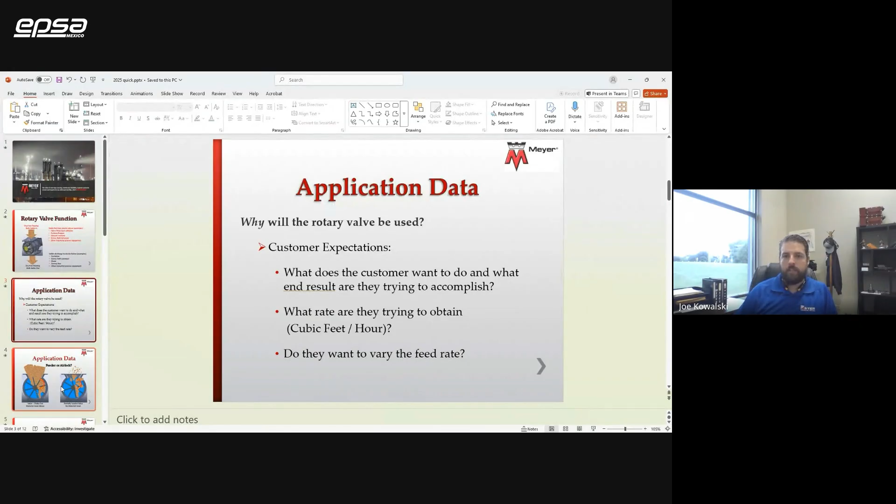A lot of that will come down to the application information. I'm sure most of you have seen the sheet that either we pass out or EPSA passes out, or fills out with you, asking all the questions: what is the valve doing, what material is it handling, what's the pressure, what's the temperature, what's the equipment. All of that ties into how the valve is going to be used and how it's going to be built. And how it is built is probably the most important aspect of avoiding problems.

At the very most basic level, is the rotary valve acting as a feeding valve or is it acting as a sealing valve? Is it going to just control the rate of material or is it going to... sorry, hold on, the slides weren't moving.

As I mentioned, material drops in, material drops out - the application information is how it's going to be used, what the customer is going to do with it, what they expect it to do. If it's a feeding device, it's going to be controlling the rate of material. If it's an airlock, it's going to be sealing against air leaking past it. There are also times where it'll be both an airlock and a feeder - we're going to maintain that pressure seal and control the rate of material.

Depending on what industry you're working in or where the customer is at, there's any number of materials that will go through the valve - either food grade, chemical grade, abrasive, non-abrasive, asphalt, wood dust - again, any number of materials will go through it.

The most common rotary valve that we supply and sell is the HDX valve, which has the broadest range of applications, can handle pretty much any material, and has the widest range of options it can use. The side entry model is used for larger particle sizes, which again, the information we want to capture on the front end as far as the application and products being used, as long as we supply the correct valve, can help avoid a lot of problems. And then lastly, we also offer the KIPS stainless easy-clean valves.

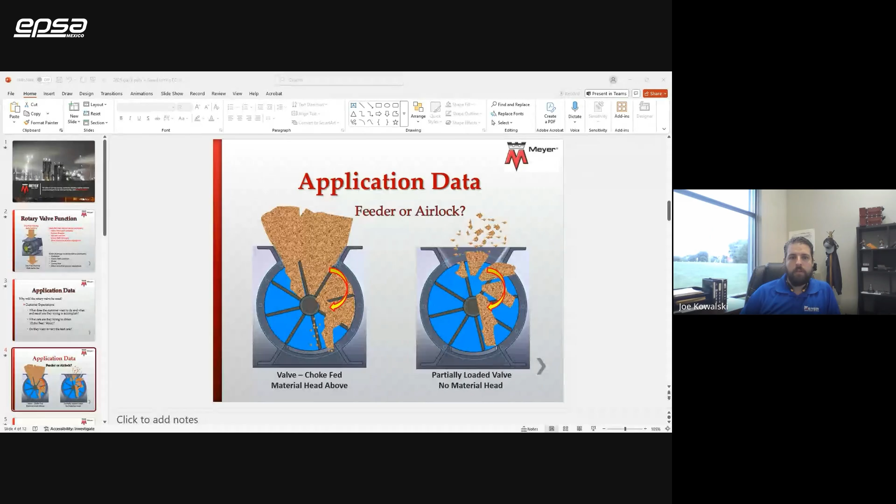The second type of leakage that will, again, always occur on all rotary valves is the leakage past the clearances. So even if the valve is not spinning, you still have that small gap between the rotor and the head plate and the housing, and you will have some leakage air go past those clearances. There's no rotary valve out there that has a zero gap, unless you're talking about a flexible seal strip rotor.

The other type of leakage that you'll see, that people know they have a problem, is leakage through the rotary shaft seal. Normally you'll either see little puffs of air escaping, or I've even seen instances where there's a pile of material next to the rotary valve seal area.

Now, the ways that we eliminate that leakage, or avoid it, or try to limit it as much as possible - the first way to limit that displacement leakage is to run the valve as slow as you can. You want to meet your rate with all the material going through the valve, but if your rate is low enough and you can achieve it with, say, a 10 RPM speed, you don't want to run the valve at 20 or 25, because you're just adding displacement leakage.

As far as the leakage past the clearances, the way we target that is all based on the temperature of the material that the rotary valve is going to handle. When you have a higher temperature material, we need to increase that gap, increase that cold clearance for when the valve is built. Because what will happen is that hot material hits the rotor, heats up, expands, and then closes up that gap. So if we have improper application information and we set up the valve for say 200 degrees C, but it's only ever going to see 40 degrees C material, that gap is going to...

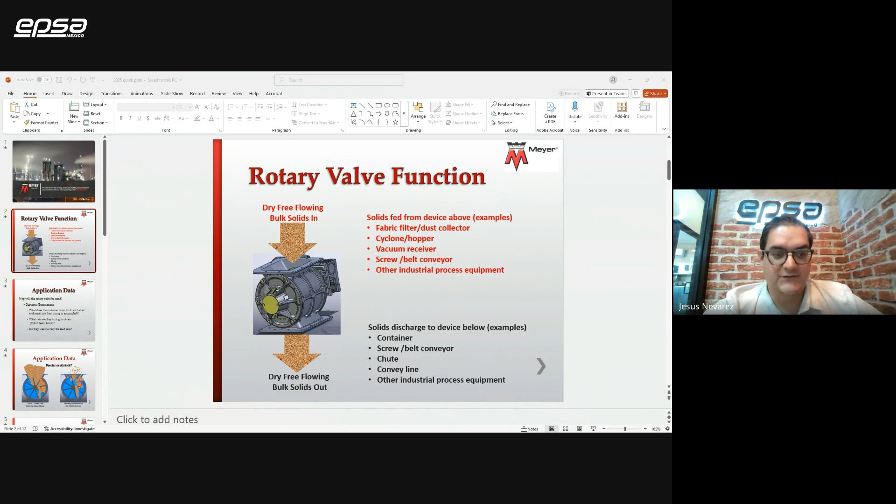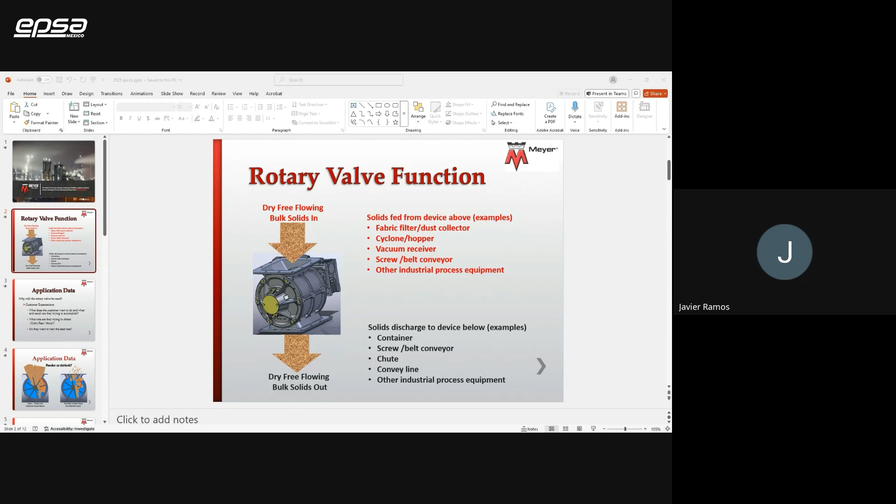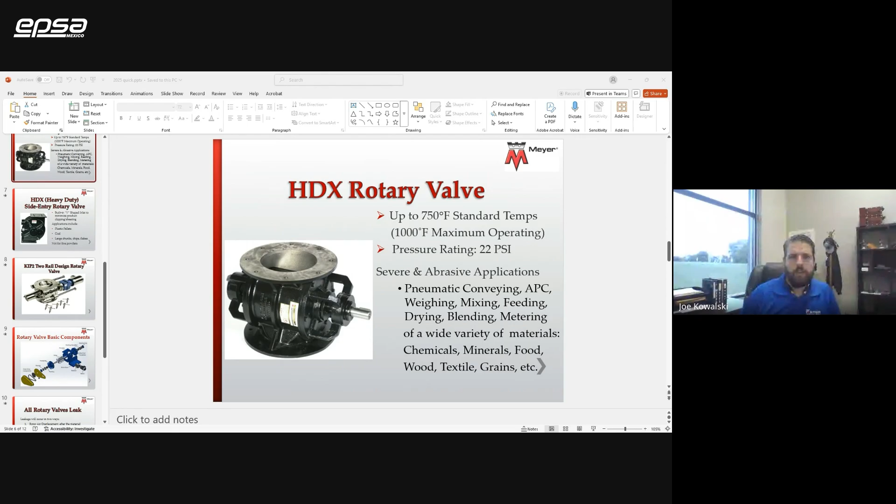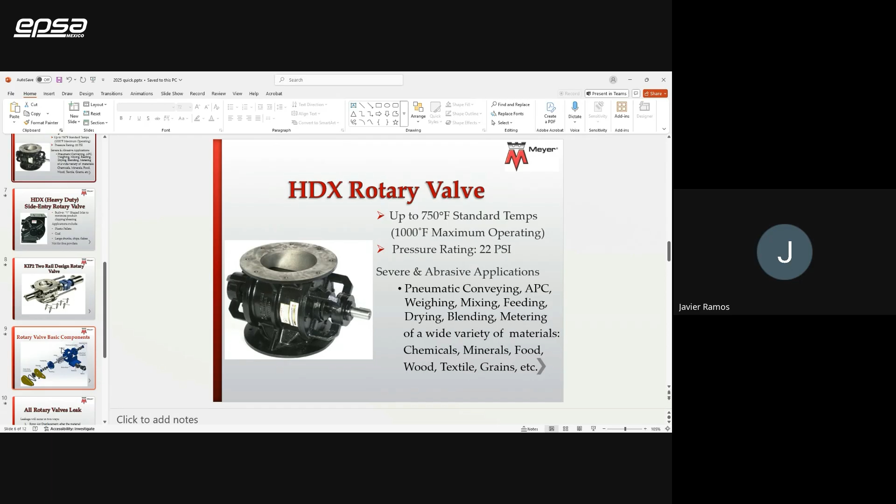Sorry, just - we can see the first slide. I think... no, this is the second slide. Okay, the first slide. You changed the slide? They said you wanted to see the first slide? We see the rotary valve function. The slide that you wanted up? Sorry. We can see the second slide. Yes. Was it the slide that you wanted up? Do you share the slide? They have - yeah, a rotary. Already see the second slide. It's okay. Is everyone showing the basic component slide now? I see the HDX rotary valve slide. You changed to the rotary valve basic components slide? Yeah, yeah.

So then for the noise, whenever a valve is experiencing squealing, generally the first question is: is it cyclical? Does it come and go? Is it only on startup? Normally what we find are the two most common causes for any kind of squealing - the first of which is temperature. If the clearances were set for a lower temperature and now a high temperature material is going through it, that rotor will heat up, expand, and can start hitting the housing, scraping against it. We'll get a metal on metal squeal.

The other main cause that we'll see is material buildup. Depending on what material is going through the valve - for example, if it's hydrated lime or sugar - it tends to smear across the inside of the valve and cause buildup. Then when that rotor is scraping against that material, you'll get a rubbing noise or a squeaking and squealing noise. The other possible cause we see sometimes is if the rotary valve is being run backwards. The beveled edges will actually collect material and can cause the valve to squeal or possibly even lock up.

The other issue that leads into the next topic is the rotary valve jamming, binding, or locking up. Again, the most common cause we see is temperature, either an elevated temperature spike or an upset condition in the system, where something happened upstream and now you're getting 300-400 degree material coming through a valve that was only set up for 40 or 50 degrees.

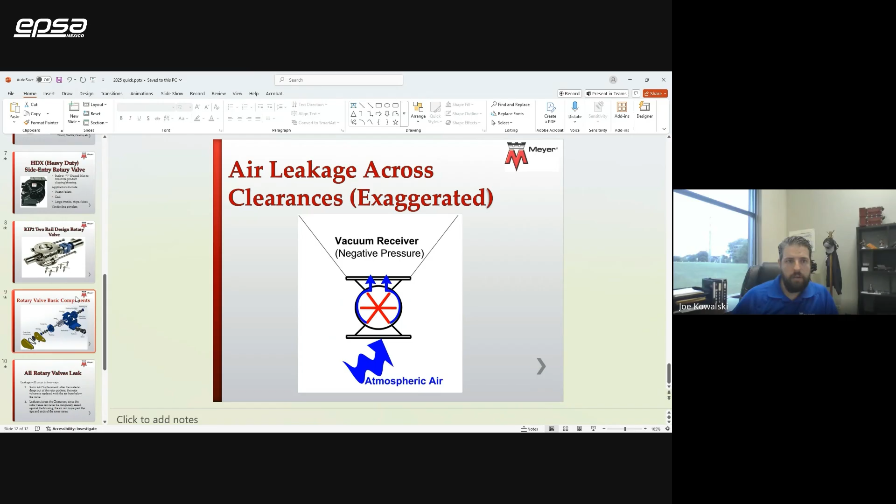A lot of that really comes down to where the wear is occurring. Depending on where it is on the rotor, we can recommend different up-armored options. We can offer chrome in different places on the valve body, tungsten on different places on the rotor, replaceable tips, bolt-on tips. We have kind of the good, better, best level of abrasion-resistant options. We also offer different pieces of equipment like airlocks, double flap gates, screw pumps that themselves are more abrasion-resistant and maintain a better seal for longer.

They do cost more, so a lot of times it's kind of what's your pain point, what's your price point. The screw pump is an absolute fantastic piece of equipment, it runs incredibly well, lasts nearly forever. You can replace parts on it if you need be, but you're typically starting at about $50,000. So usually it's how many problems are you having, and are you ready to commit to that next level solution. Whereas for the majority of customers, just up-armoring the valve or adding some different features or options as far as venting or air purge will generally get the problem solved for what they're having.